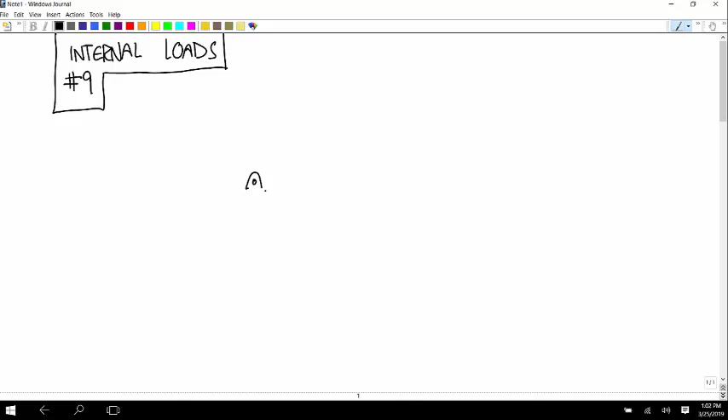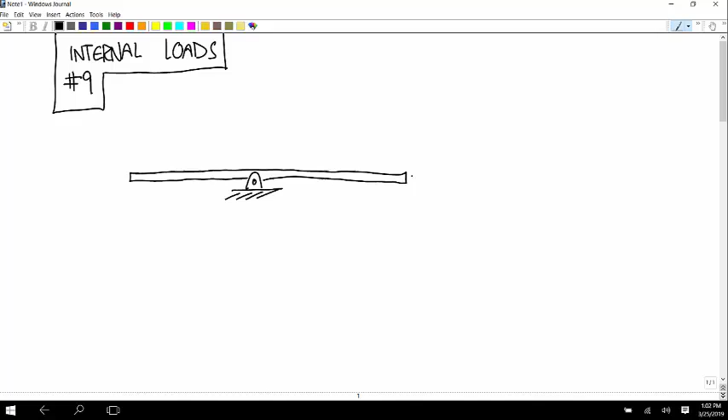Okay, so this one has a pin joint in the middle, and a roller at the right end, and a torque over here of 4,000 Newton meters.

Any idea how many Newton meters of torque you can apply with like a screwdriver? Is it 100 or 1,000 or 10 or 1? I think it's about 10 is about as much as you could probably do with a screwdriver.

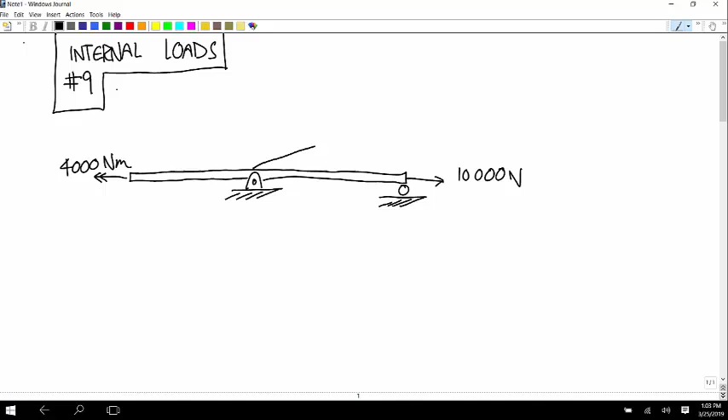And then we have a distributed load with the triangular shape, and maximum is 15,000 newtons per meter. And this thing also has a weight of 800 newtons.

The whole thing is 1 meter, and the pin joint is at the middle, so it's half a meter each side.

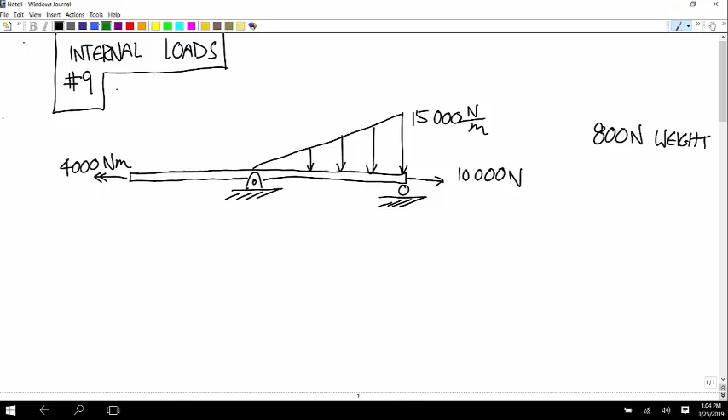All right, well, the first thing we have to do is calculate the external loads. So first I'm going to isolate the whole thing. And once you've chosen what to isolate, you can treat distributed loads as point forces.

So we have a torque over here. We have a weight force acting at the middle of 800. We have an unknown vector at the pin joint, at the same place as that 800. I'll call that RP for pin.

The triangular distributed load acts a third of the way from the roller toward the pin, and that's 3750.

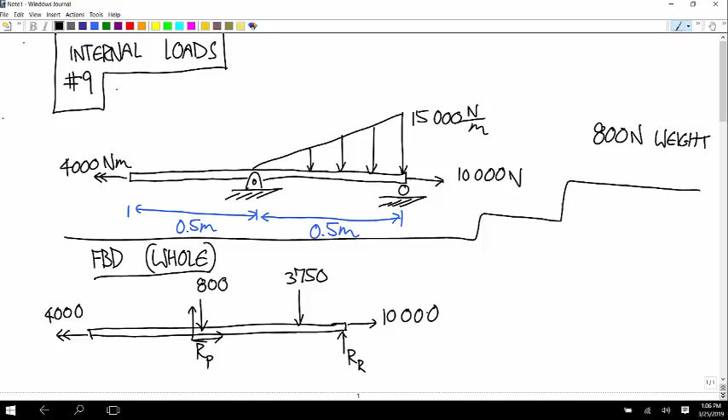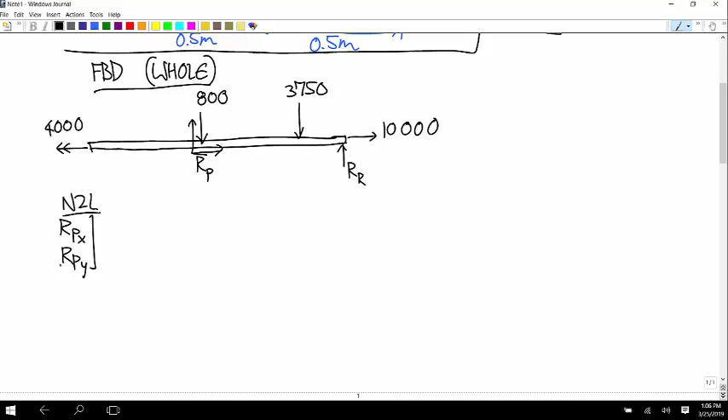And then you have a force RR, the reaction at the roller, and the force of 10,000 newtons. Newton's second law says RP, break it up into components, plus 0, negative 800, plus 0, negative 3750, plus 0, positive RR, plus 10,000, 0, is equal to zeros. Okay.

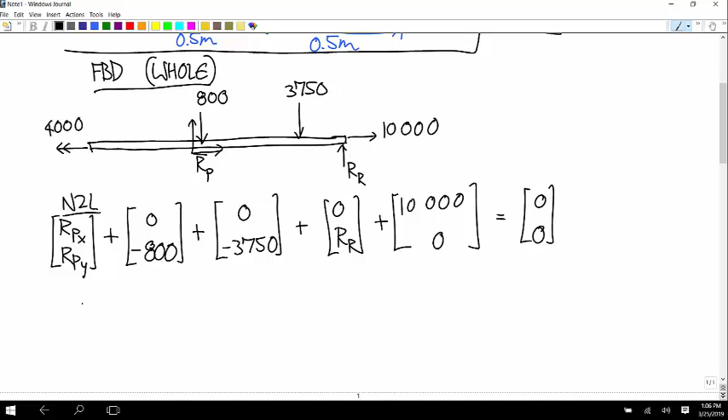And then we have to do two. Oh, I'm missing one thing in the free body diagram. What's the thing that I'm missing? That's true, but that's not the thing I was thinking of.

Yes, exactly. So since we're applying this couple of 4,000 Newton meters over here, if something wasn't counteracting that, this thing would just spin about the z-axis. The thing that would counteract that couple is the pin joint. The pin going through it, or whatever it's rotating about, keeps it from rotating. So we also have to put, I guess I'll do it like this. I'll call that the torque pin, TP.

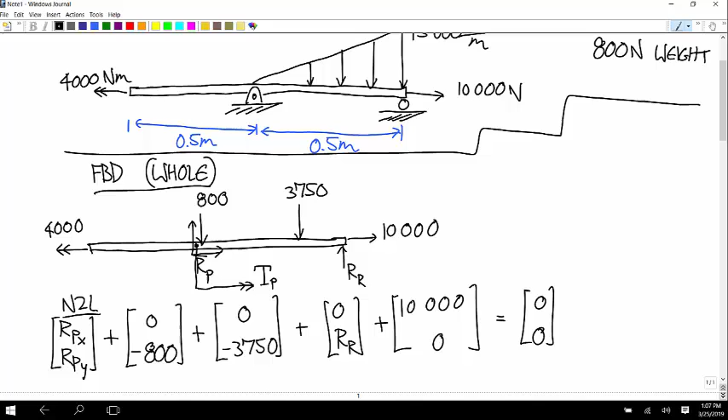The base of this triangle is 0.5. 0.5 times 15,000 is 7,500. And then the area of a triangle is 1/2 base times height. So half of 7,500 is 3,750, right?

So now I'll do the moment equation about the x-axis. By the way, you could do this all as a single vector equation where you just have stuff going on in the x component and the z component. I'm used to breaking them up into two separate ones, but...

So we have in the x direction negative 4,000 plus torque at the pin is equal to 0.

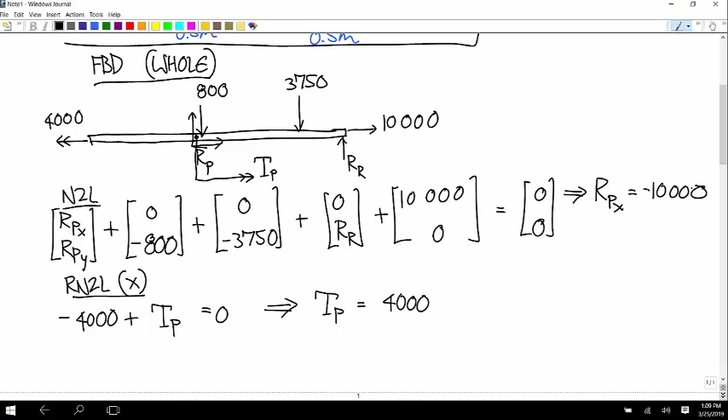Okay, so what do we know so far? We know RPX is negative 10,000. From this one, we know the torque at the pin is positive 4,000. This is newtons. This one's Newton meters.

And then the moment equation about the z-axis. Let's put the about point at the middle. So the 800 doesn't do anything. RP doesn't do anything. What's the moment arm for the 3750?

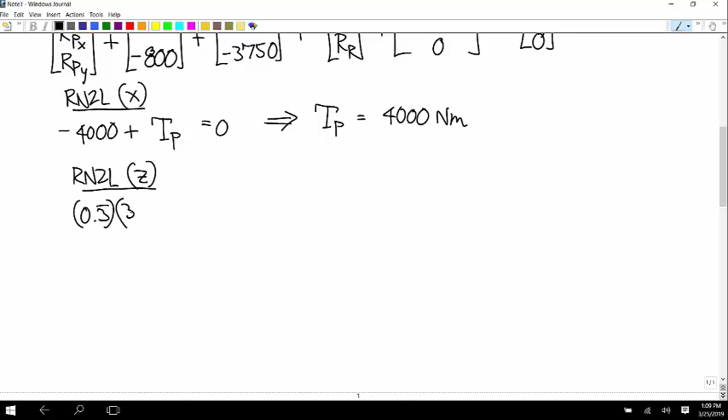2/3 times 0.5. So that's just 0.3 repeating. So 0.3 repeating times 3750. And then, yeah, think about the direction. That would make it rotate clockwise around the pin, around the about point. So that's negative.

And then you have RR, that is a moment arm of 0.5 times RR. And that would make it rotate counterclockwise, so this is positive. And so this tells us that RR is... I can't do that.

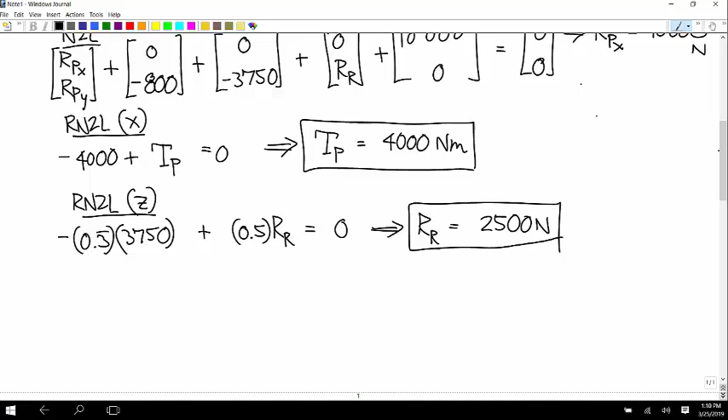What's 0.3 repeating times 3750 times 2? Ooh, 2,500 newtons. We have this, and then we also know the x component here.

And now calculate RPY. 4,550 minus 2,500 is 2,050. Positive.

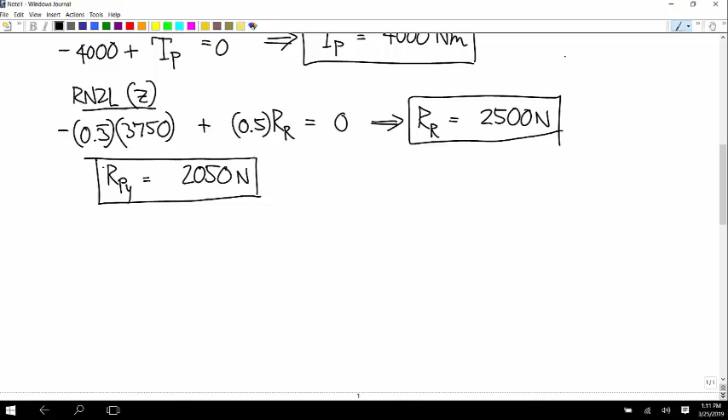Yeah, yeah, you can do that. You could do... yes, you would have to do it as, so like if you're writing it out like this, yeah, I guess the way I would write that out in the moments is you'd have...

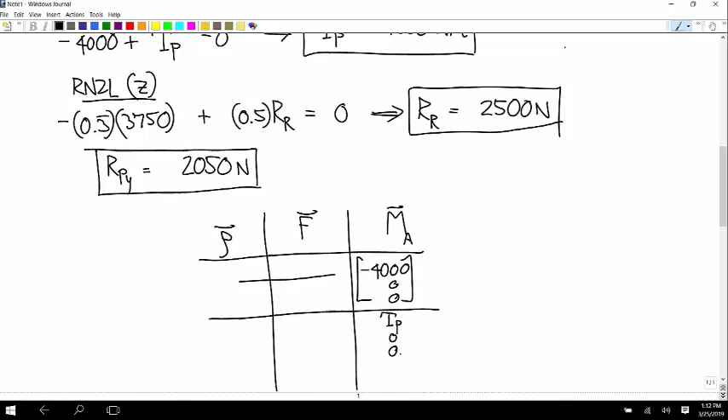Negative 4,000, 0, 0. You'd have the TP, 0, 0. You'd have the ones about the z-axis would be like 0, 0, 0.5 RR. And you'd want to write out the separate, do it as vectors, and then you just sum up those vectors and set them equal to 0.

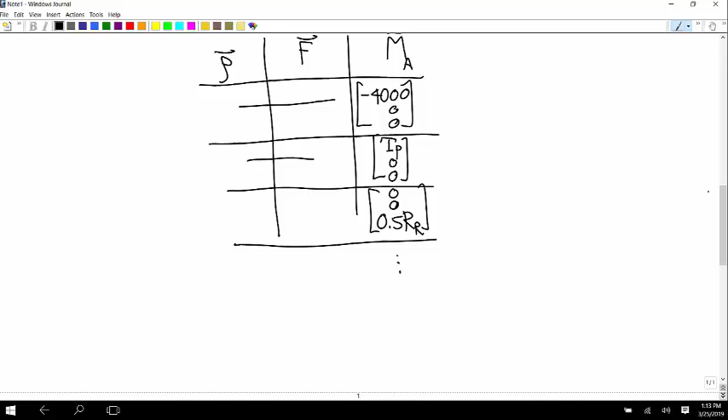But from the pin to the end is only half a meter. So yes, you're right that it's 2/3 of this distance from here to here, but this distance is only a half.

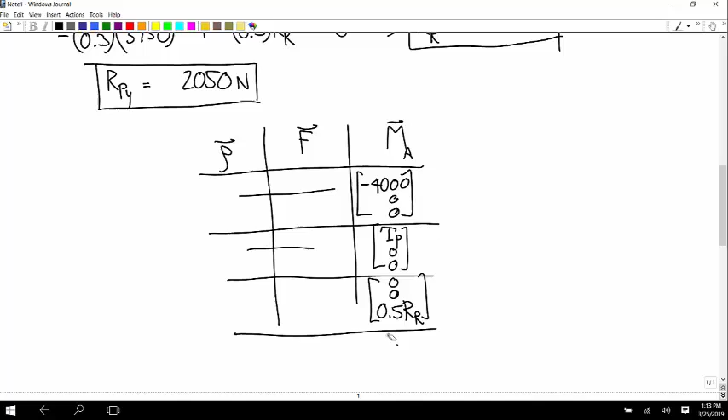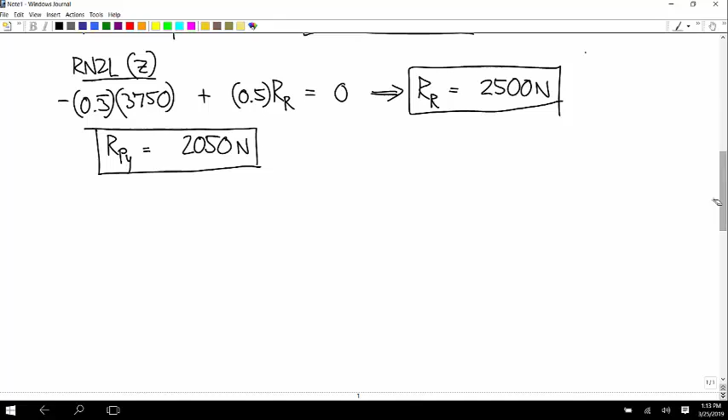Okay, so now we can do the cuts. How many cuts are there going to be?

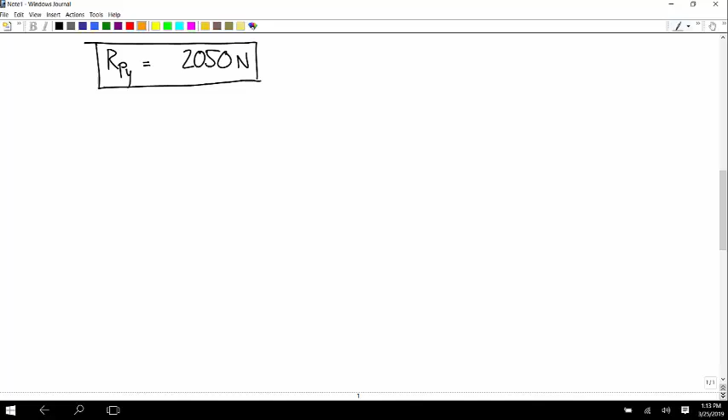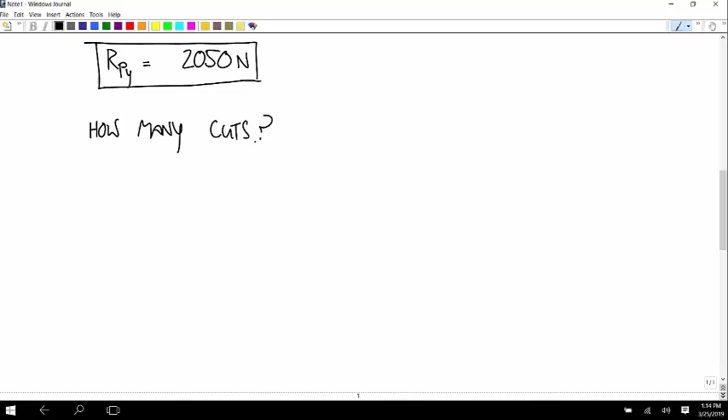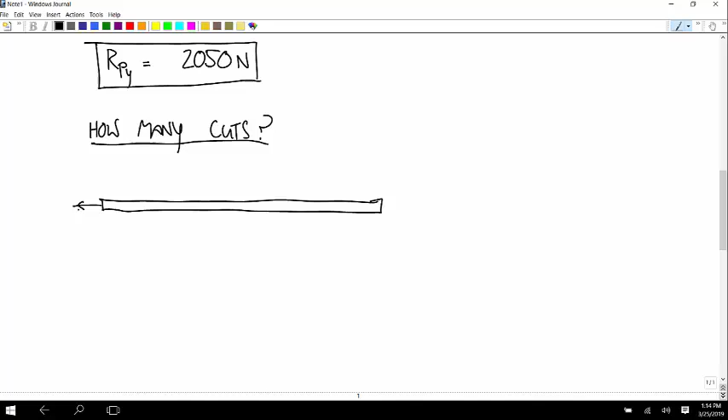So how many cuts? In order to do that, you have to think of all the loads on this thing before you treat the distributed loads as point forces. So what do we have going on? We have a torque over here. We have a bunch of stuff at the middle. We don't have the 800. That's sort of a key thing.

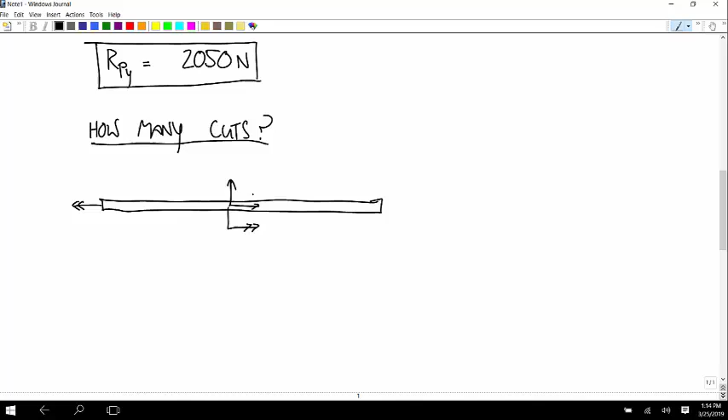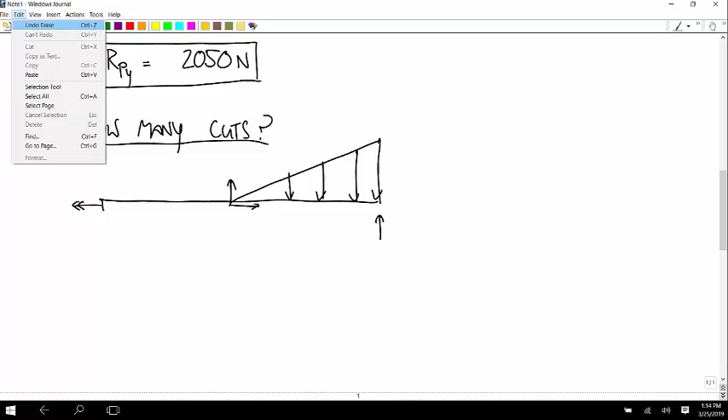So we have this force at the pin. We have the couple at the pin. We have this distributed load. We have the roller. And now we have the weight. For the first part of the problem, we represented the weight as a point force, but weight isn't really a point force. So before you represent distributed loads as point forces, the weight is this.

Okay, and so now we're looking for places where, well, we know where the endpoints are, two of these key points. And now we're looking for any place there's a point load, besides the endpoints, or any place a distributed load function changes.

So all of these end up telling us this, except the key thing that I want you to notice here is when you look at the weight force as a distributed load, there's nothing that happens with the weight force at this midpoint, okay? And so if these other things weren't here, we wouldn't need to treat this as one of those key points that determine how many cuts to make, because it's just a uniform distributed load, the weight force. You see what I'm getting at?

If you look at the free body, that first free body diagram I drew, we treat the weight force like it's acting at this pin here. You would think that something important with the weight force happens at the midpoint, but it doesn't, okay?

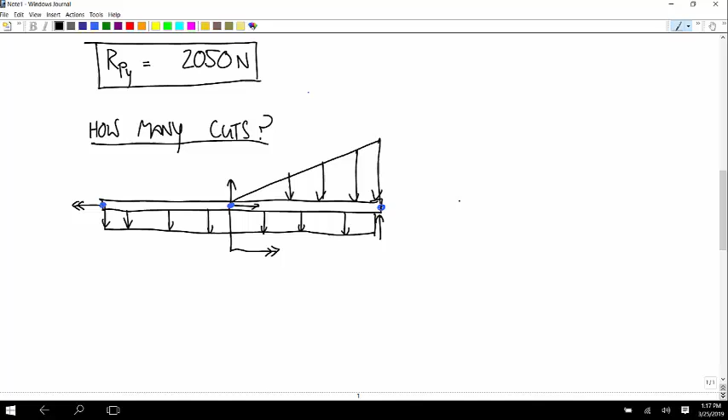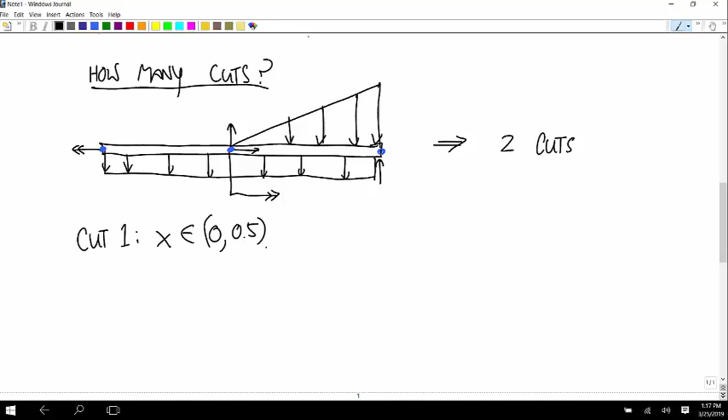So cut 1 represents x values between 0 and 0.5. And it has the weight, the torque, and that's all. Then the internal loads. Okay, so we have the torque over here of 4,000. We have the weight force.

What's the magnitude of that uniform distributed load? How do we calculate that for the weight force? We have a total weight of 800 newtons. We have a total length of 1. So the newtons per meter is 800 divided by 1. So 800 newtons per meter.

And then we have these internal loads, T, V, M, and torque. Before I do Newton's second law, we have to represent that weight now as a distributed load, as a point force. It is a distributed load.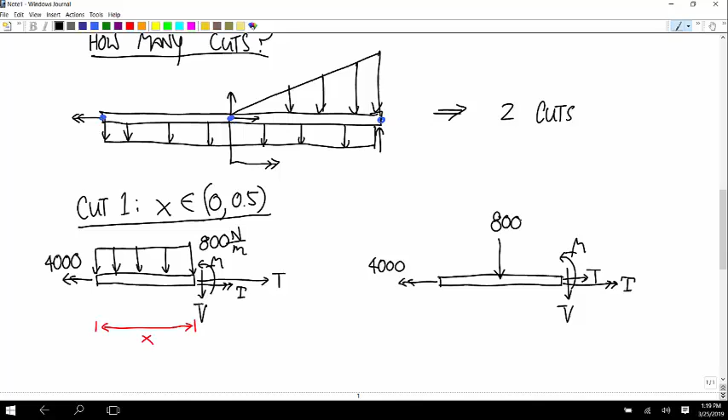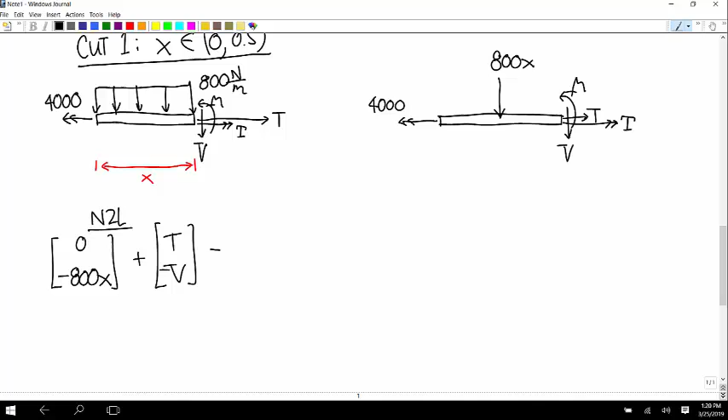Newton's second law says 0, negative 800x plus t negative v is equal to zero. So t is equal to 0, v is equal to negative 800x.

And then the moment equation about the x-axis, we have negative 4,000. The only other couple about the x-axis is fancy t. And so the internal torque is equal to positive 4,000.

And then the moment equation about the z-axis, I always use the left end as the about point. So we have the force of 800x. What's its moment arm? X over 2, yep. So x over 2 times 800x. And is that clockwise or counterclockwise? Around the about point. Clockwise, so that's negative. And then we have plus m minus vx is equal to 0.

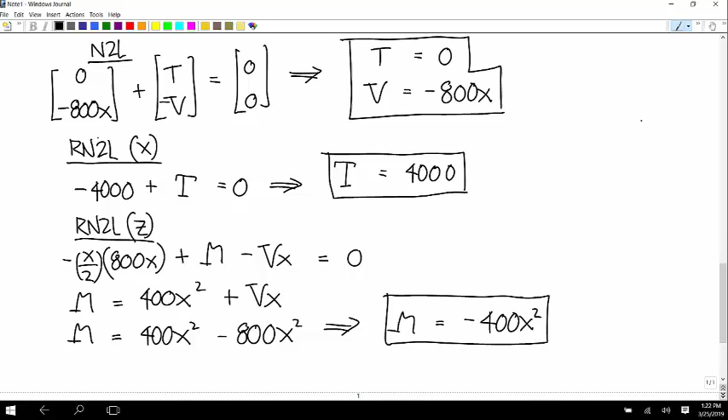And now you can check all the derivatives and make sure they work out. dm/dx is equal to v. Negative dv/dx is equal to 800. And that's the downward distributed load function.

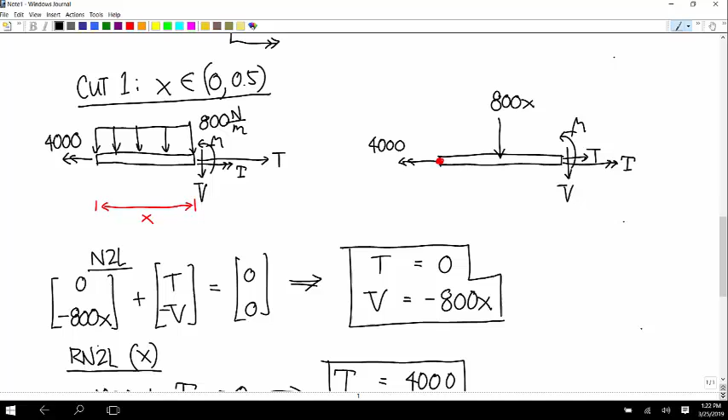Any questions about the first cut? The cuts, every cut represents like an infinite number of actual cuts, you know what I mean? And so, right, the function representing the weight, you're right, will never change. That's right.

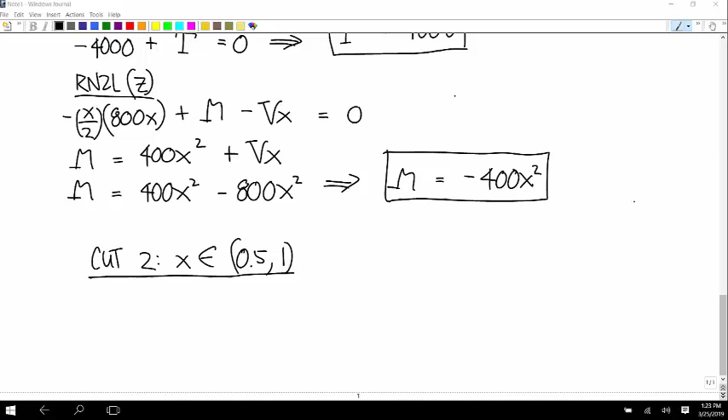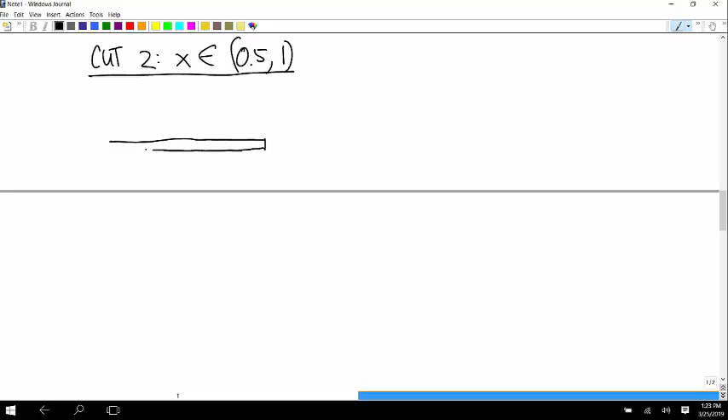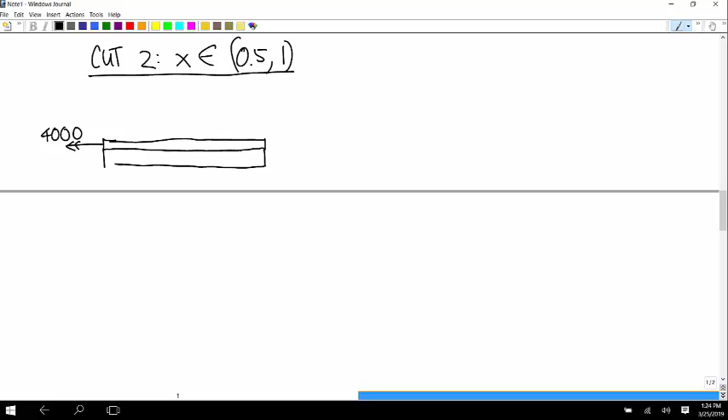All right, so now cut 2 represents x values between 0.5 and 1. And this time, all right, we still have the 4,000 over here. We still have the distributed load representing the weight, and that has a magnitude of 800.

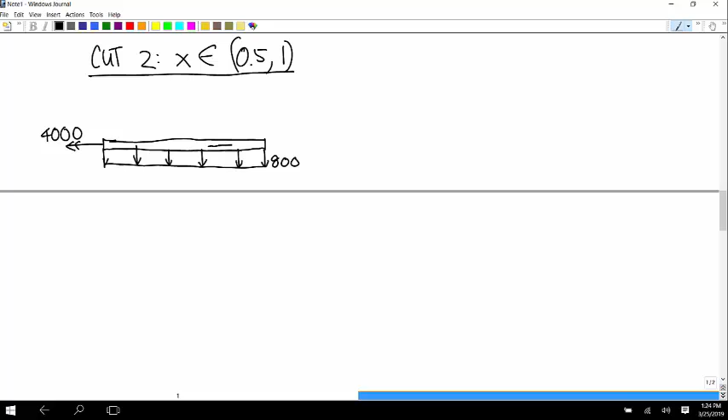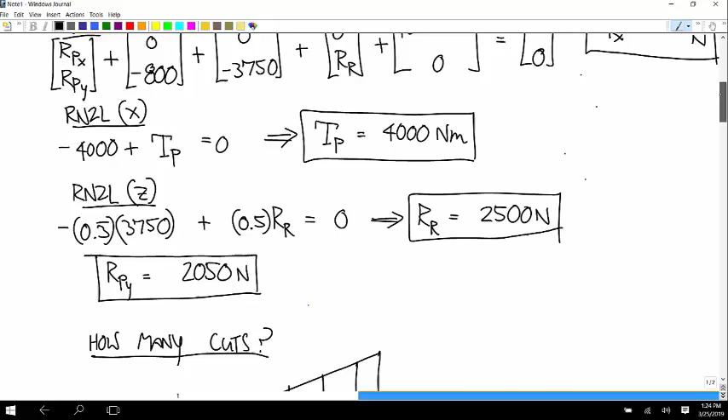We still have the stuff happening at the pin, so that's a force vector of, we got that in the first, when we isolated the whole thing. So RP is negative 10,000, 2050.

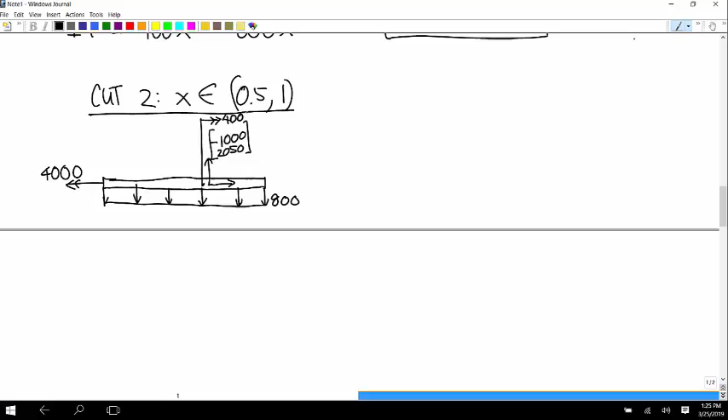And then we also have the torque that's equal to 4,000. And then we have the triangular distributed load.

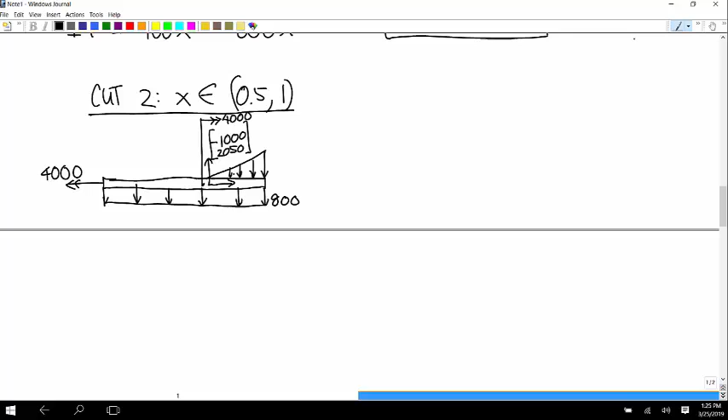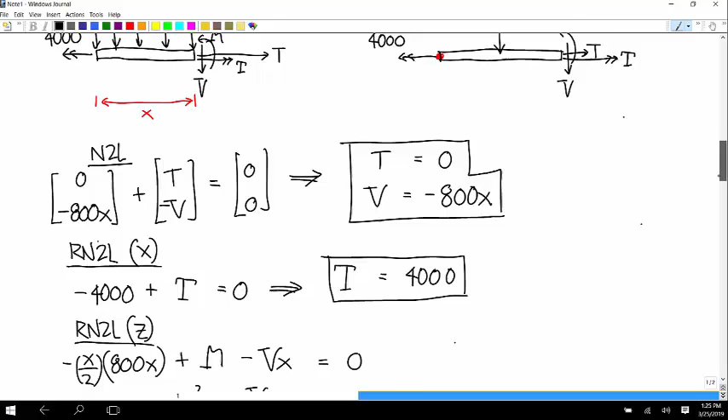And that does not have a maximum value of 15,000 because we're not going all the way to the end. So we have to figure out the function of that line in terms of x. Okay, so we know this is going to be mx plus b.

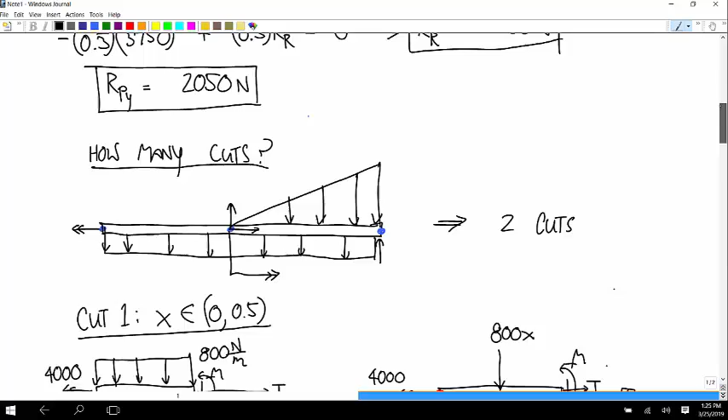So y is equal to mx plus b. For m, we can just take the rise over run. So it rises from 0 to 15,000 over a run of 0.5. So that's 30,000.

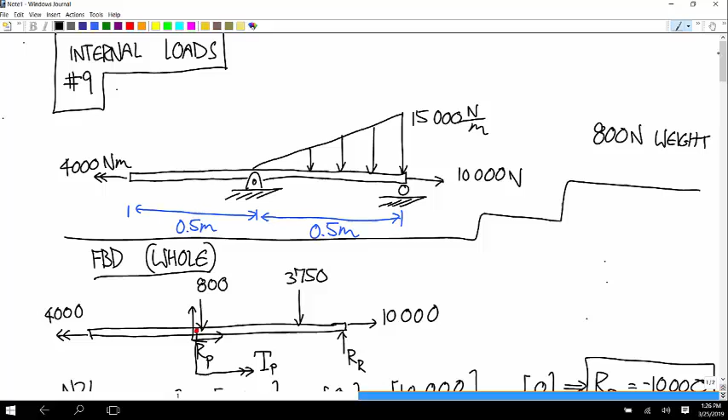Now to find b, we know that when x is equal to 0.5, y is equal to 0. So 0 is equal to 30,000 times 0.5 plus b, so b is equal to negative 15,000.

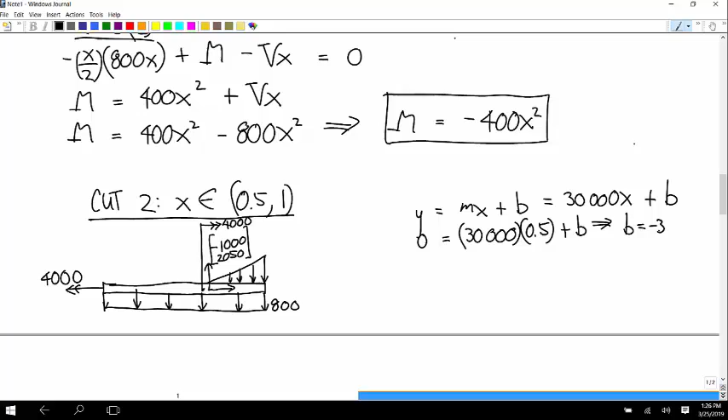And so the function is 30,000x minus 15,000.

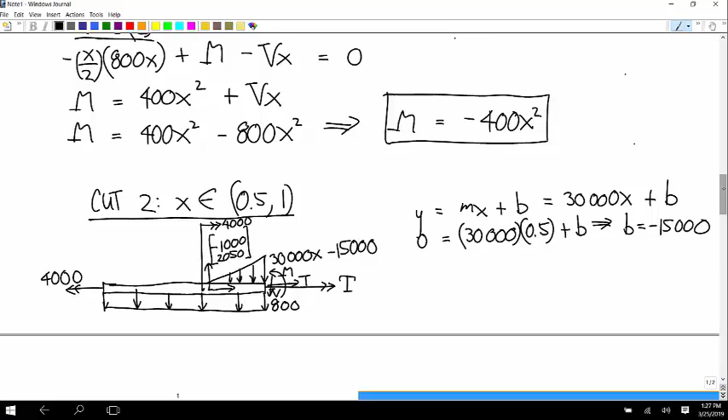And then you have the distributed load, the internal loads. And now we have to represent these as point forces, the two distributed loads. The weight is easy.

The triangular distributed load has a height of 30,000x minus 15,000. And what's its base? The width of it is x minus 0.5, because we're just talking about this distance from here.

Right. Okay, we're on the second side. So that triangular distributed load starts at an x value of 0.5 and ends at x. So this distance is just x minus 0.5.

And so the area is x minus 0.5 times, this is also x minus 0.5, and then multiply the whole thing by 30,000. So that's x squared minus x plus 0.25 times 30,000. So 30,000x squared minus 30,000x plus 7,500.

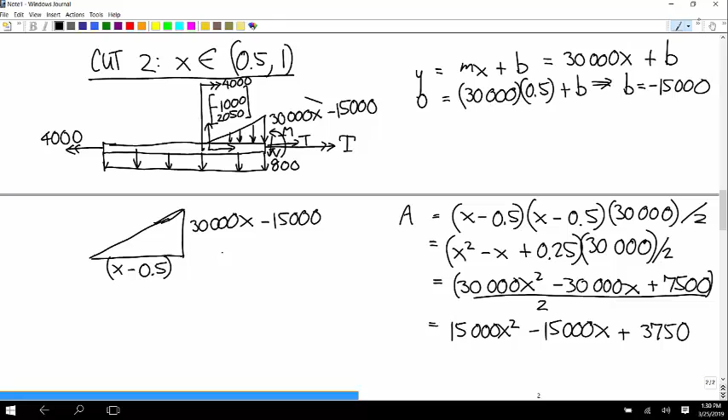Okay, so now I'll redraw this free body diagram. We have a torque of 4,000. At the middle, we have a force of negative 1,000, positive 2050. And we also have a torque of positive 4,000.

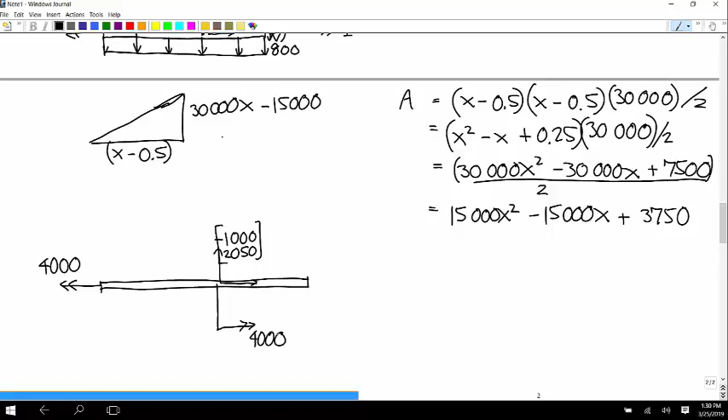I don't know, 10,000? Yep, thanks. Negative 10,000.

And then we have a weight of 800x. And then we have the force from the triangular distributed load. It's a downward force of 15,000x squared minus 15,000x plus 3,750.

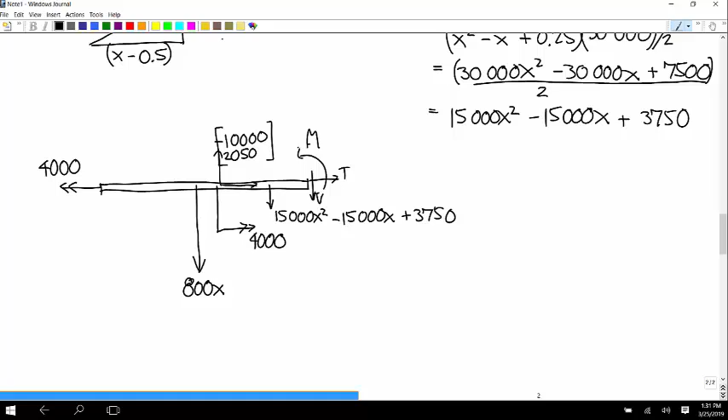And then the internal loads. And our about point will be this.

So Newton's second law says 0, negative 800x plus negative 10,000, 2050 plus,

now this force has a magnitude of 15,000x squared minus 15,000x blah blah blah, but that's in the negative y direction. So this is 0, and then all these negative.

Again, I think the best way to think of that is this is the magnitude, and we're multiplying it by a unit vector 0, negative 1. So 0 for x, and then negative 15,000x squared plus 15,000x minus 3,750.

And then plus t, negative v. So t on the second half is equal to 10,000.

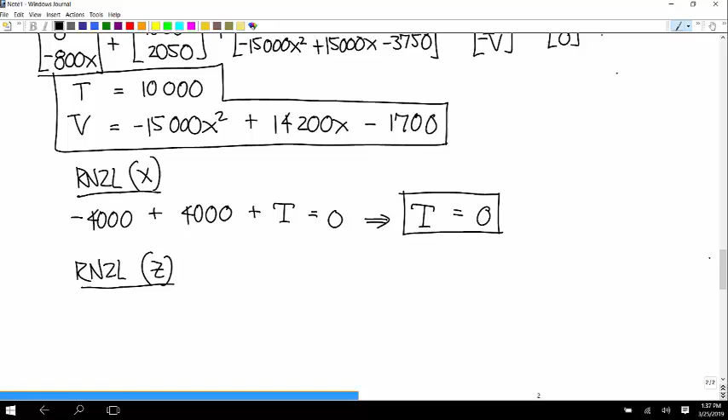So the internal torque on the second half is just equal to 0. But about the z-axis, so we have 800x with a moment arm of x over 2.

Yes. Okay. So, no, this is of everything in internal loads, this is the thing people get confused about the most. And even people who had it straight a week ago get confused about it a week later. So I said this before, but this won't be the last time.

So we are not cutting a piece that starts, like this doesn't represent what our free body diagram is of. This represents the range of possible right hands of our cut. But we always start all the way at the left of our cut. So our piece goes from the far left end up to some x value that's in this range. Okay, so we always include everything all the way at the left. And this just tells us where we stop.

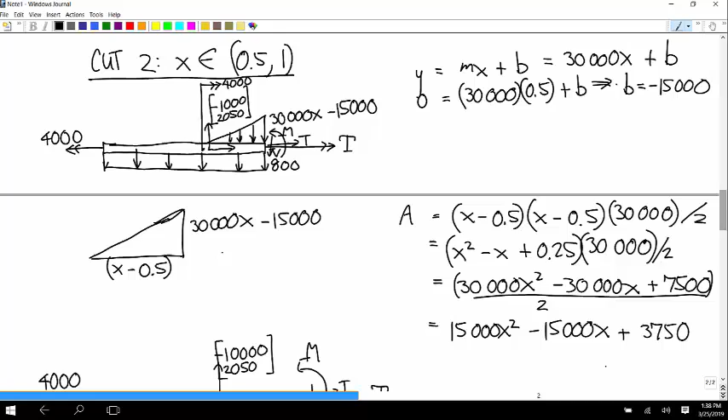What? So let me talk about that in a second. Let's finish doing this and then I'll talk about that.

Basically, the answer is if a problem is a lot easier to do a mirror image of, like you're looking at this beam and you're like, God, I wish everything was backwards, it would be so easy to calculate, just go over here and look at the beam and do that problem.

Yeah. Will it ever be that there's like a pin that doesn't cancel the torque entirely? You have two things that have to balance one? It will never, no, because it wouldn't be statically determinate. So not in this section, but when we get into statically indeterminate structures, then yes.

Okay, so the about point is the red dot. First we have the downward force of 800x with a moment arm of x over 2. So x over 2 times 800x, and that's a clockwise moment, so negative.

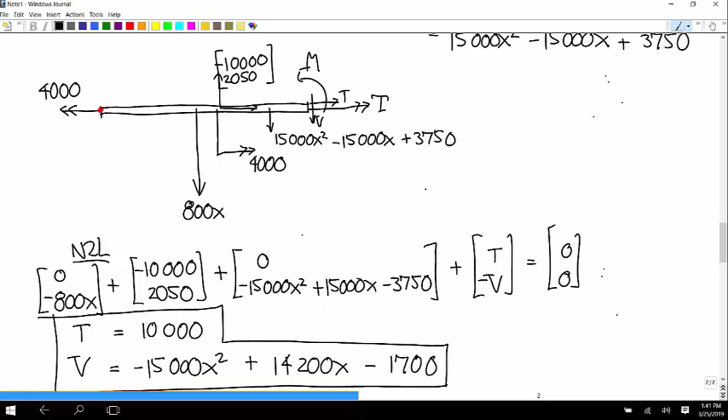And then we have the messy function. Okay, so magnitude of that force is this quadratic function. So 15,000 x squared minus 15,000 x plus 3750. Is that what it was?

And now what's its moment arm? Well, we know it's 2/3 of the way from here to here plus 0.5. Okay, so this distance is x minus 0.5. This distance is 2/3 of that, and then we're going to add on 0.5. Are you with me on that? So the moment arm, this a little.

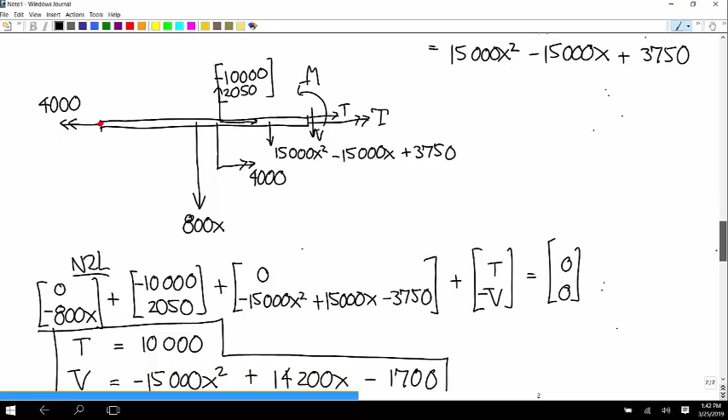Okay, so the moment arm is 0.5. I'll make this brackets, plus 2/3 of x minus 0.5. And that's a downward force that would make a clockwise rotation, so this is negative.

And then plus m minus vx is equal to 0. Yep.

Because this, this does not have a length of 1. Okay, it has a length of x. We don't know what that x is, so like x could be anything from 0.50001 to 0.99999. If the length was 0.50001, then the length of that triangular distributed load would just be 0.00001. If the length is 0.999, then the length of that triangular distributed load is 0.4999, you know? So that moment arm has to be true for any value of x between 0.5 and 1.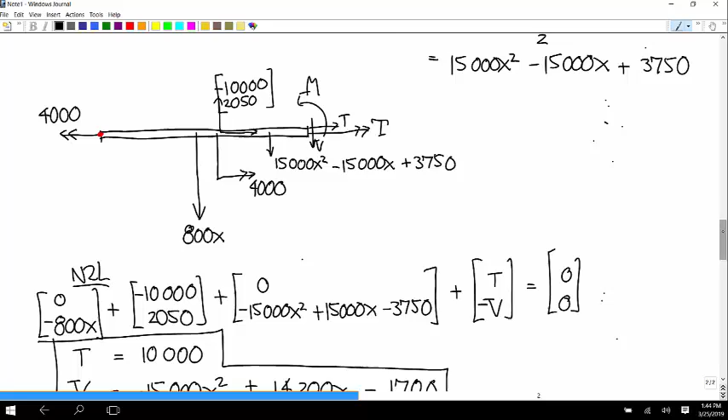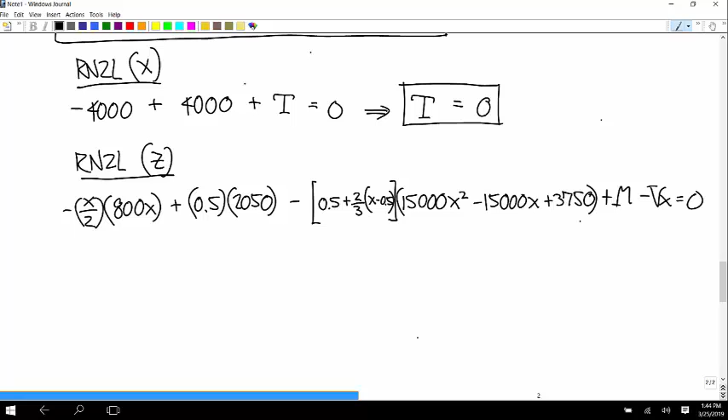I think maybe this is where we stop on this problem, but I don't want to take the fun out of this for you. We didn't get, right, so you're going to have to multiply this by x and blah, blah, blah. Okay, so I'm going to stop there, but that's the procedure. Anybody have any questions about that?

That makes more sense, actually. So instead of thinking of it as 0.5 plus 2/3 of this thing, just think of it as x minus 1/3 of it. It's not really different, I mean, obviously they come out to be the same if you do the algebra. But just think of going all the way to the end of x and then backtracking instead. Do whatever makes sense to you. I think actually, now that I think about it, 50% of the time I do one and 50% of the time I do the other.

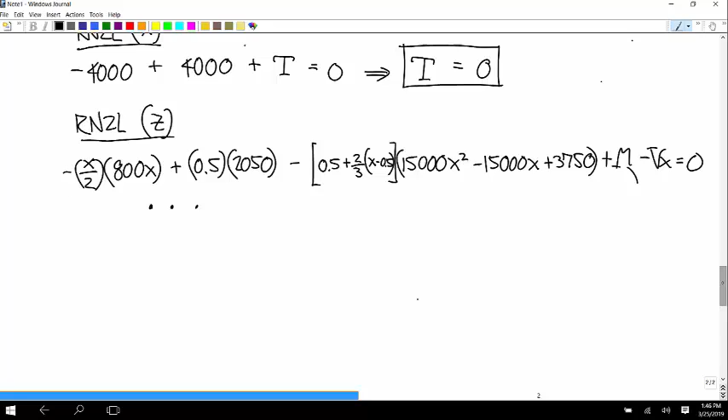Okay, the next thing I want to do, I'm not going to do it today. We need to get done with internal loads, but there's one more thing I want to do.

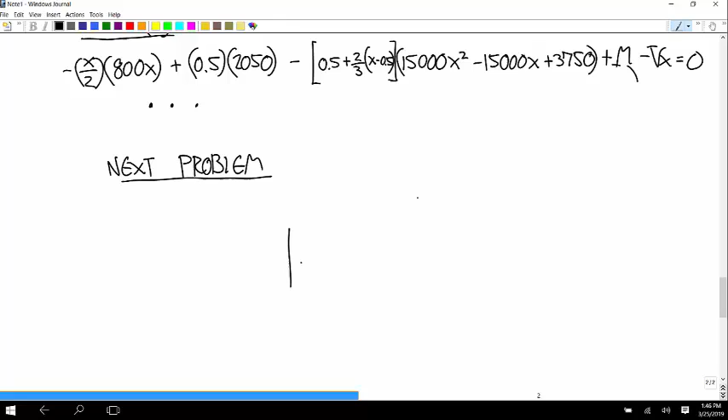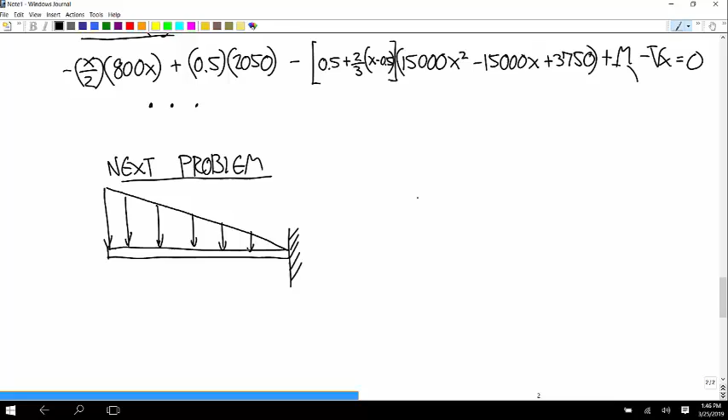What if you had a problem like this? That doesn't look too bad, right? The one we just did looks a lot worse than that. This is surprisingly ugly, though, to calculate.

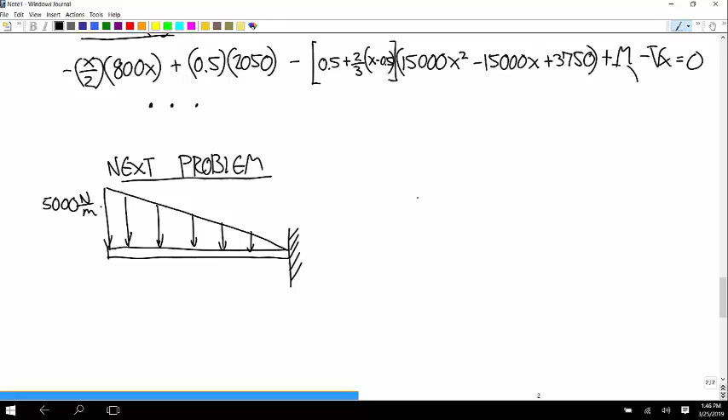Because when you do the cut, the fact that that triangular distributed load is facing the direction it is means that your cut removes its triangular character. You know what I mean? Like we do this cut, and now we have this trapezoidal distributed load.

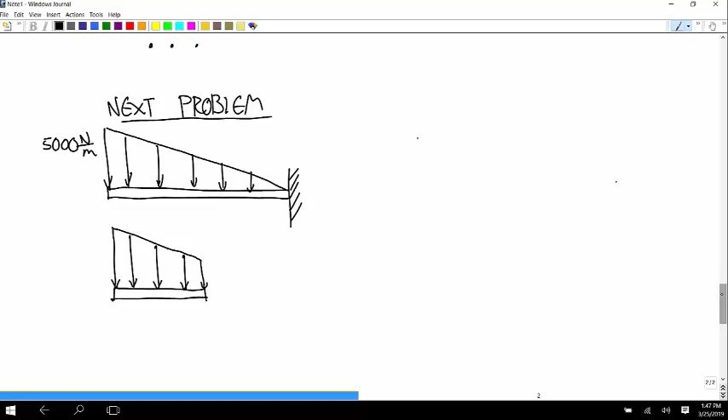That is what I would do, except here's the only downside. We are going to do some problems where you just have to do them like this, because what if you had something like this? Now you're stuck. Yeah, right. Yeah, that would be a pain, but then anyways, you have to do one of the backwards ones no matter which side you're on.

But yeah, I really like the get up and walk approach to complicated problems. All you're trying to do is come up with a relationship between the internal loads in some place and a material point in the beam. So there's no reason not to.

So for this one, yeah, this top one, the way to do that is just think of it as in the opposite direction. Oh yeah, it is kind of like that.

Yeah, so what we're going to do is break it up into a triangle sitting on top of a rectangle. This digitizer is getting funky, that's why it looks like I'm developing Parkinson's or whatever. But then we'll just think of this as the sum of two different distributed loads. You don't even have to add them together. You're going to have a point force that's equal to the area of that rectangle acting there, and a point force equal to the area of that triangle acting a third away, and do it like that.